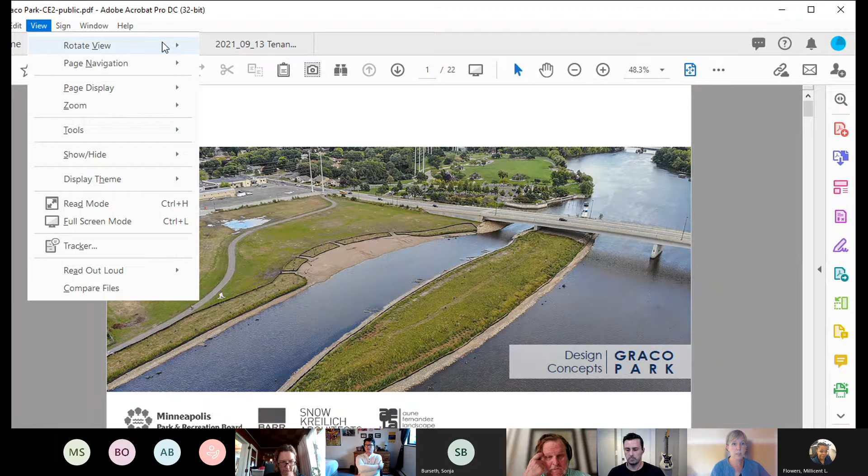All right, so this is a shot of Halls Island, which is right next to Graco Park, and then Graco Park there, sort of in the background.

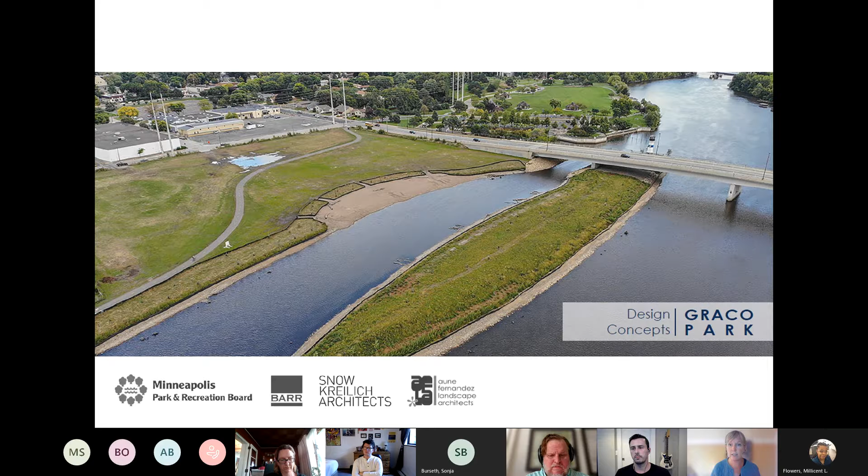A few years ago, there was a proposed easement in front of, this is actually Graco, the business, the headquarters. There was a proposed easement in front of their business, and the agreement fell apart. There was some litigious activity, and finally a settlement was reached. Basically, the park board wanted to ensure that we were going to have an easement for the East Bank Trail so that we could connect from Sheridan through this park, which was not yet called Graco Park, to Boom Island. As part of that settlement, we got the easement free of charge, which is wonderful. So that East Bank Trail connectivity can remain and continue to be enhanced.

We also received a large foundation donation from Graco, which has propelled the park design process that is currently underway. So it really expedited the build out of Graco Park by probably close to a decade. So we're excited to be here now to be taking these next steps.

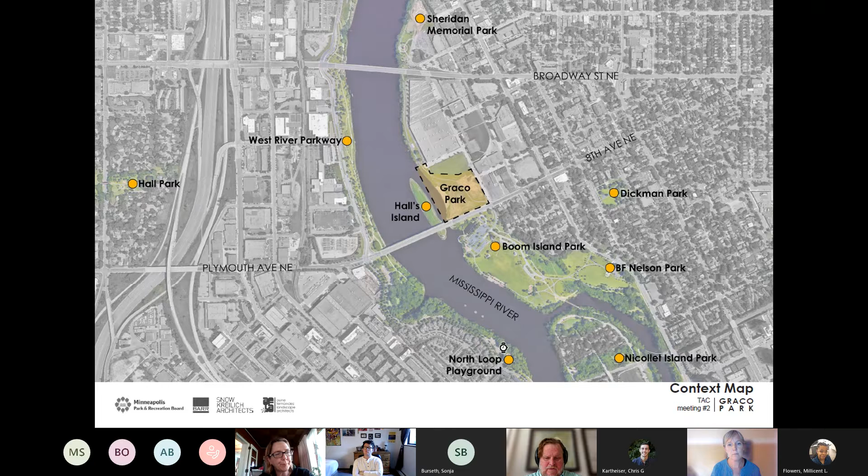And so we actually have wrapped up our first round of community engagement. I believe that Emma had reported out when the initial engagement push was happening, but wanted to save our big conversation with this committee for this particular stage in the process, because we've compiled all of our initial community engagement findings, which I hope some of you shared your thoughts in that initial survey. And we also did quite a bit of technical analysis of the site. So here's a breakdown of some of those findings.

First off, the site is a little bit sort of this future development site for Graco that was actually part of the settlement, and they purchased this little corner from us. I mentioned that easement is in place, which is what we need to, of course, have public trail or pathway on private land, but that East Bank Trail, the future regional trail connection, is in place. We also did a lot of analysis around, this is a flood area, so got to understand and analyze the 100-year flood area and look into the flood barrier that will be required for different park design concepts. So I'll actually be sharing those flood nuances as we go through the concepts.

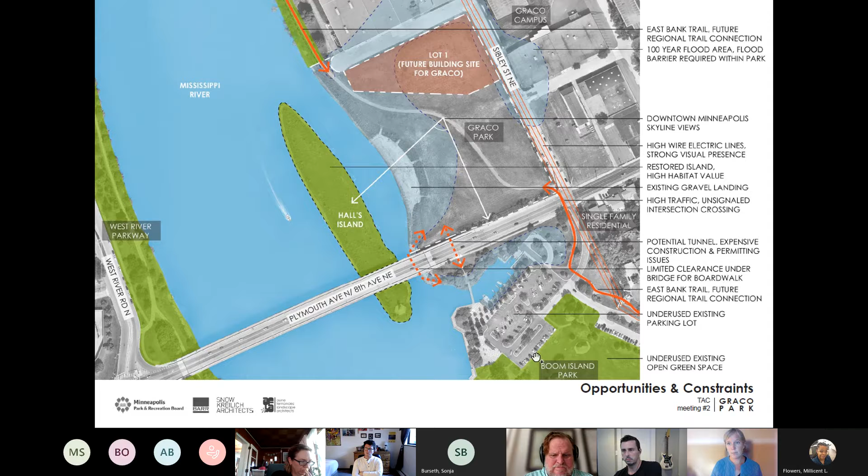And one other thing to note is that I already mentioned the green space at Boom, but also that there's a really large parking lot at Boom Island. The project scope does not include any improvements to Boom, but it is, I think, important context as we think about event spaces or other types of uses for Graco. That certainly, for some folks, has been a concern with thinking about the design. A little bit of context, and then all that more technical analysis. We also did a lot of community engagement in this project launch period.

So out at neighborhood meetings, did some pop-up conversations at Graco. We've had project advisory committee, the other PAC, technical advisory committee, so park board staff, and then agency partners, a number of city staff actually on that technical advisory committee. Lots of online engagement and outreach in the age of COVID, a public virtual open house, a big youth engagement push with a bus tour with over 60 youth that actually drew design concepts for the park that our design team used as very deep inspiration. A lot of the ideas are showing up in these concepts I'll share with you. And then we did some intercept interviews at Graco.

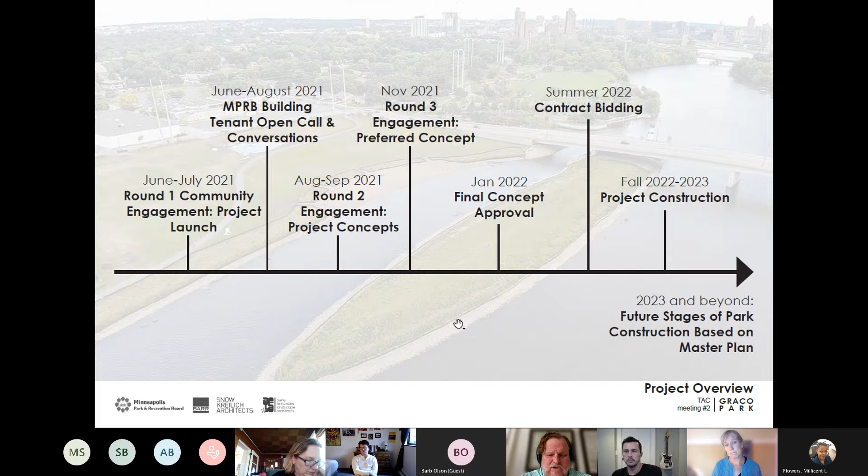Carrie, thank you for that. If you want to continue to 2 and 3 explanations, but I would like to say that after you talk about the third potential model, there might be some questions regarding how the climate crisis that we're in factored in, if any degree, to the planning that you and your colleagues have done. I know you've mentioned planning for flooding and native habitat restoration, that kind of thing. So we might follow up on that, but just so you're aware that that probably will be addressed. Great. I'll keep that in mind as I chat through concept 2 and 3. Thanks. Thank you. All right.

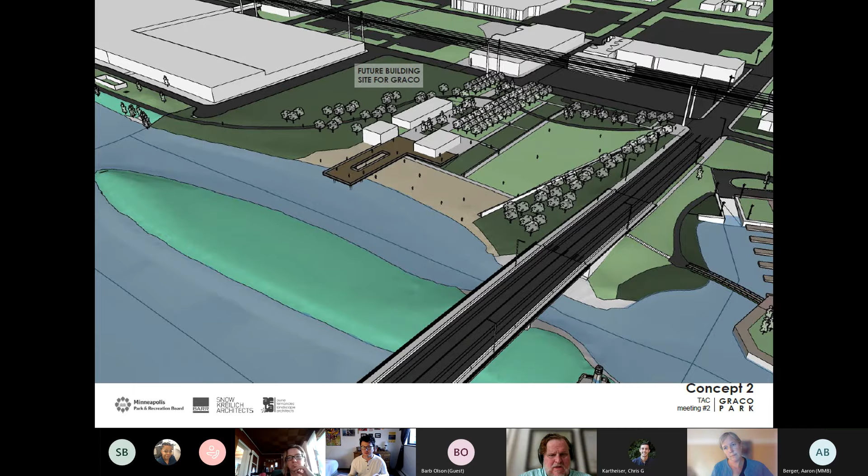Any initial responses to underpass versus intersection? You're saying that you think the underpass would feel safer? I suspect we'll get more feedback after we see the third concept. But first, Austin, you had your hand up, if you want to dive in now, and then we'll continue with the third concept. I was actually going to comment on the underpass versus street crossing concept, so maybe I'll hold my question until we're ready to talk about that. Awesome. Terrific. Carrie, if you would.

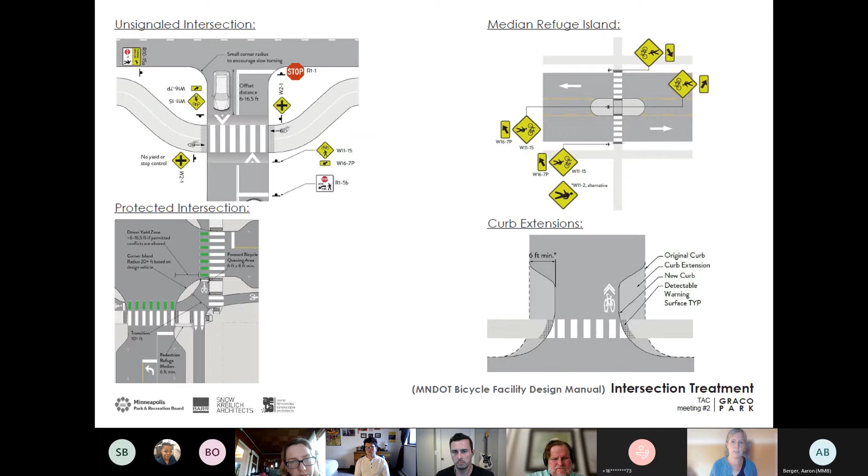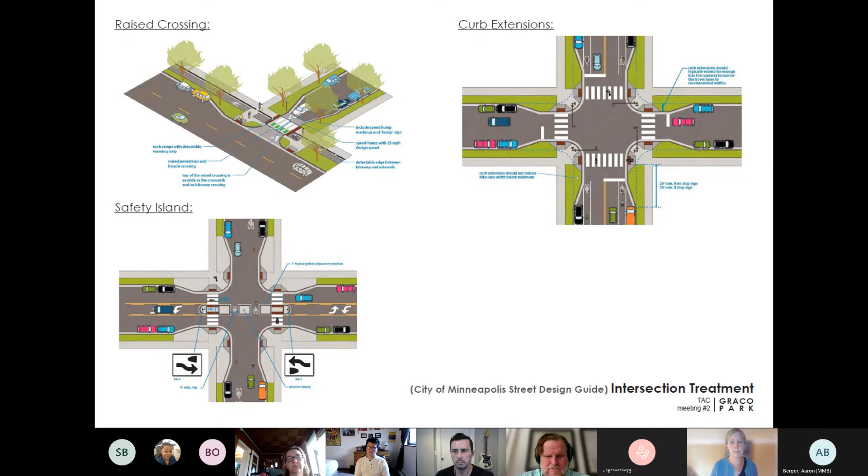But again, it is a state aid road, it is a city-owned street, and we will be working in collaboration with the city and state aid road standards on developing a design. Those conversations really have just begun. But the city is really excited about the potential of the East Bank Trail connecting up to the city network, making sure we're at least improving the crossing in collaboration. So hopefully that gives you enough context to keep digging in to your great points around underpass versus intersection or both.

Any other questions or thoughts? Not regarding the intersection, but I have a question regarding the flood barrier and your planning on that. Could you expound on that a little bit? What do you mean by a barrier, and how is it computed? I know you computed on a 100-year anticipated flood, but it seems to me that these 100-year floods are becoming much more frequent. Can you just talk about the design process and what informed that decision, and what the flood barrier would look like in these different concepts?

Yes, so we're working with Barr Engineering, and I'm not a hydrologist, but they have helped us model the site over time, and also did a historical look at flooding, dating back to the 60s, which is the last time we saw a 100-year flood in this particular part of the river. But the flood barrier itself is identified through modeling, through software that looks at elevation points, and so that's what the idea of a barrier is. Probably a misnomer, though.

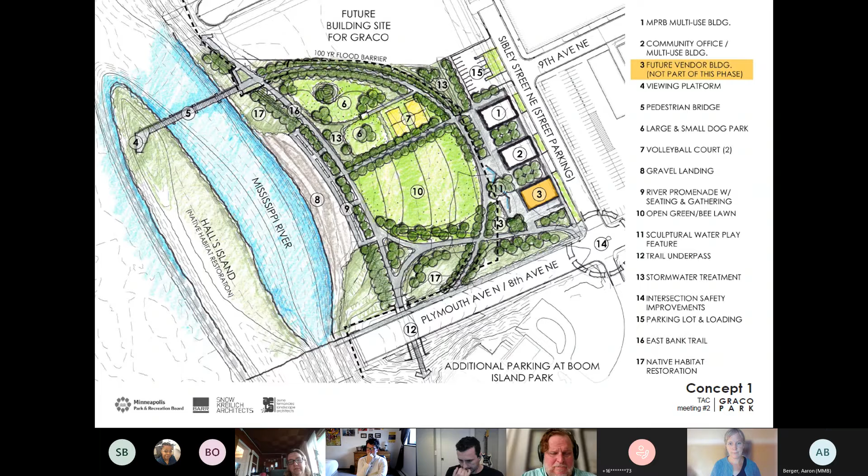And I'll just jump in here, and then we're going to go to Austin. I just want to echo. I've got one too. Okay, and we'll go to Austin and then Julia. And I'll just be real quick.

I concur with Aaron, partly because you have a flow in a park along the river, and then there's this barrier, and then you have to shift to go into the traffic and undergo what Aaron was talking about if you have family or younger members with you, and then come back down to the river. I think that is a barrier that I would encourage to be removed.

And I think the way that you've talked about that is to do a wide underpass. And so the flow of pedestrians and cyclists can just be along the river. Because that seems like a primary design guideline, and a focus of the settlement with Graco is to get that easement, that connection, so you can do these kind of things.

So with that being said, Aaron and then Julia. Oh, I'm sorry, Austin and then Julia.

Thanks. Yeah, I agree. In normal circumstances, I'm definitely pro underpass. I just am thinking of climate change and what happens when the river permanently rises, because I think that is something that we're looking at. And the reason why I say this, it's so funny. I was just in Chicago visiting family, and near Lake Michigan along Lakeshore Drive, there's tons of underpasses that let pedestrians access Lake Michigan, and several are permanently flooded because Lake Michigan is rising.

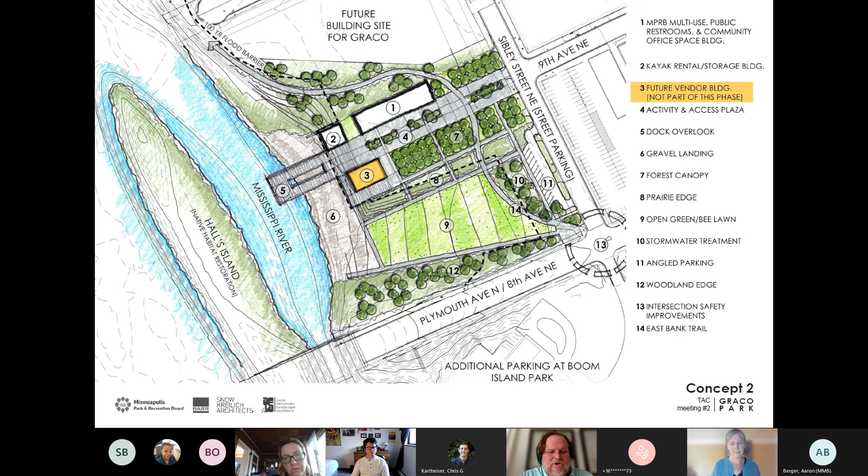And what I don't like, for whatever it's worth, is concept 2. I just get the feeling that it's Peavey Plaza light. There's so much building and trucks, and it's too much. I think my inclination is for 3, native grasses, native trees, flood zone trees, the island not accessed. That for me personally has an appeal.

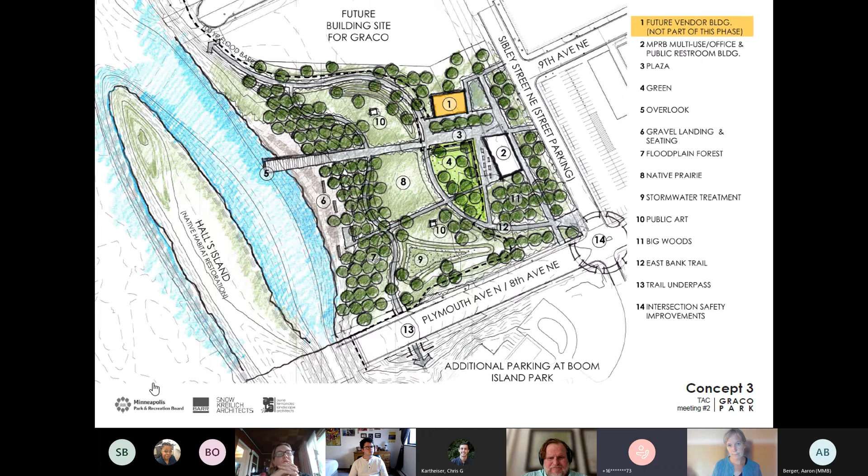So does anyone else have any follow-up comments, closing comments, or questions that we can briefly address? I have one last one, just a comment. All right. Okay. Go ahead. When you were mentioning the sort of implicit activation of the space through tenants, I was really excited and thought it might mean that there would be housing associated with this, and was disappointed when it turned out it wasn't. So it sounds like a great step if there's a way of incorporating housing, really making it higher density, and that would help address some of what Barb was raising, which is something that also limits how I use this area. So that's my comment.